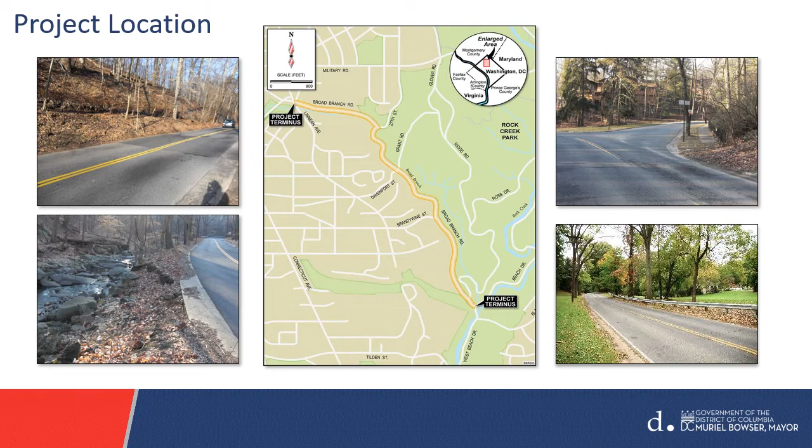Because this project is considered a federal action, the current environmental study is being performed in accordance with the National Environmental Policy Act, or NEPA. NEPA requires that the potential environmental impacts of all federal actions be considered prior to implementation. In the case of this project, there are several factors that make it a federal action, including federal funding, federal permits, and the possible use of federal lands owned by the National Park Service. Therefore, under NEPA, this environmental assessment has been prepared for the proposed actions.

The initial environmental assessment was completed in October 2013, and a public hearing was held the following month. This revised draft environmental assessment has been prepared based on the comments received on the 2013 document. Additional analysis was conducted and has now been released for public review and comment.

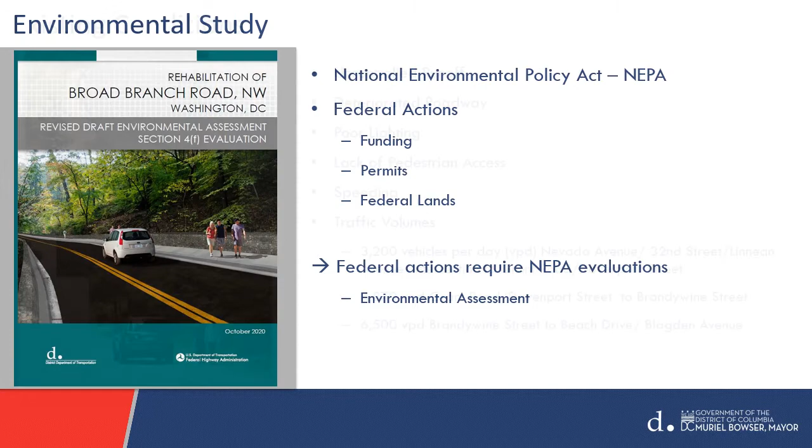The first step in the NEPA study was to identify the existing conditions along the roadway corridor. For many of you that live or travel the corridor, much of this will be very evident. For years, there has been uncontrolled runoff from the elevated parcels, particularly to the west of the roadway, which has led to the deterioration of the existing roadway, as well as impacting water quality upon receiving waters of Rock Creek Park.

For those of you who travel this roadway in the evenings, once it becomes dark, there are safety issues associated with the lack of lighting. Local residents have been requesting safe sidewalks along the roadway be considered, as well as improved pedestrian and bicycle access to and from the park.

DDOT has also heard numerous concerns of speeding on the roadway as it exists today, and the possibility of what it could be like in the future. And if you look at the traffic data on the roadway, it actually carries more volume than you would anticipate. Although rural in nature, the roadway provides a major cut-through and results in the traffic volume shown on this slide.

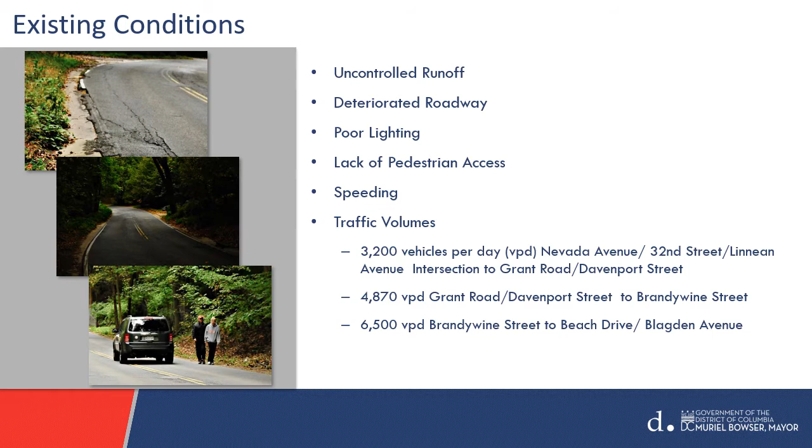By recognizing these conditions, it helps the project team define the purpose and need for this particular project. In very simple terms, the purpose of this study and the proposed action is to rehabilitate Broad Branch Road by correcting the poor road conditions as well as improving drainage to better control stormwater runoff.

Broad Branch Road is also traveled by pedestrians and bicyclists. Several members of the community have indicated that they would like to see improvements for these two modes of travel, by including sidewalks and bike lanes. Others have indicated that they would like to have improved access to Rock Creek Park. And listed last on the slide, but certainly not least, is safety. One of the overriding factors for improving this roadway is to improve the safety of all those that travel upon it.

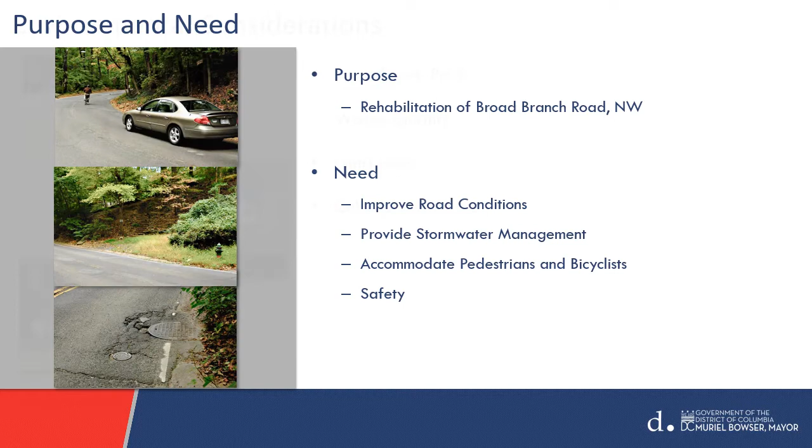While developing improvement concepts for the roadway, the project team had to be aware of the numerous environmental considerations present along the roadway. As noted earlier, Rock Creek Park and Broad Branch Stream border almost the entire eastern edge of this 1.5-mile segment. Water quality in both Broad Branch and Rock Creek has been degraded over the years, some of it attributed to the uncontrolled runoff that comes down from the western slopes and across the roadway before entering these receiving waters. The roadway also traverses a variety of land uses, including residential neighborhoods, embassy residences for 5 different sovereign nations, parks, and several community facilities. And unbeknownst to many, the area surrounding the roadway contains several cultural and historic resources.

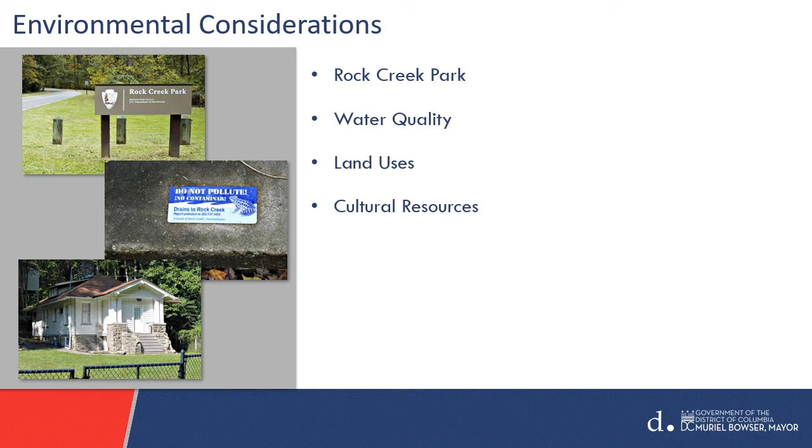As we have noted, there are a number of natural resources in the project area. Most are associated with Broad Branch, either the water itself or the habitat that it provides along its course. There are also several historic resources in the area. Two historic districts bound the roadway and include historic trails and bridges. And there are long lengths of historic stone walls and stone boundary markers associated with Rock Creek Park along the length of the roadway.

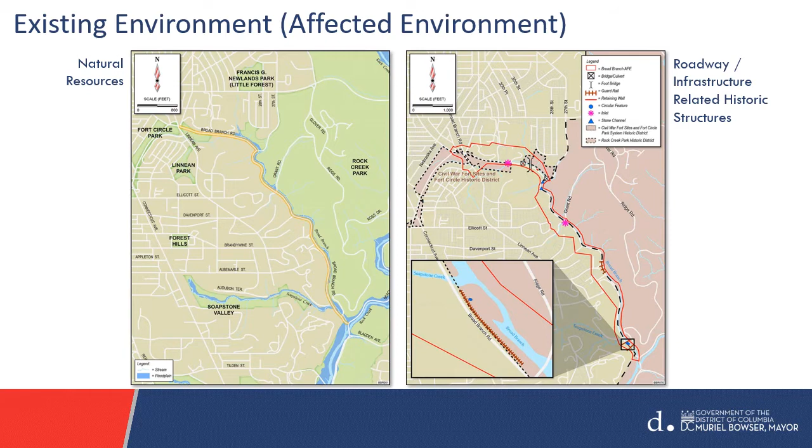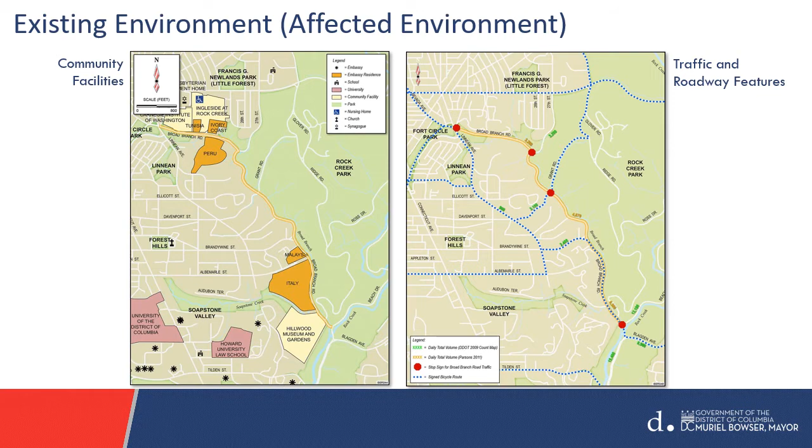The roadway is also lined with a number of residential and community facilities. As shown in the figure on the left, there are embassy residences, parks, schools, and religious facilities, all nearby, and many of which are accessed either directly or indirectly by this segment of Broad Branch Road. And, as noted in the project's purpose and need, the roadway itself provides a very important link, not just up and down Broad Branch Road, but also for the many connections that it provides for commuters and park visitors. It truly serves its intended purpose and actually accommodates higher volumes than was originally anticipated.

There were others who said, if we're going to make this improvement, why not make it safer for pedestrians by including sidewalks on one or both sides? And there was also a large contingent of bicycle enthusiasts that wanted a bicycle lane to be included. All of these comments were taken into consideration. The project team looked at different ways of constructing the roadway, including various lane widths, different types of curb and gutter, sidewalks with varying widths, protected bikeways, stormwater management, and green spaces.

The challenge became, how do you incorporate all of the desired features within a limited amount of city-owned right-of-way? On the northern end of the project, the district right-of-way is as wide as 90 to 120 feet. However, on the southern end, it is limited in some areas to 30 feet. Commenters who said, 'I want wider roadways. I want improved curb and gutter. I want sidewalks. I want bike lanes,' came to the realization that they were asking to fit a 50-foot wide facility in 30 feet of available right-of-way.

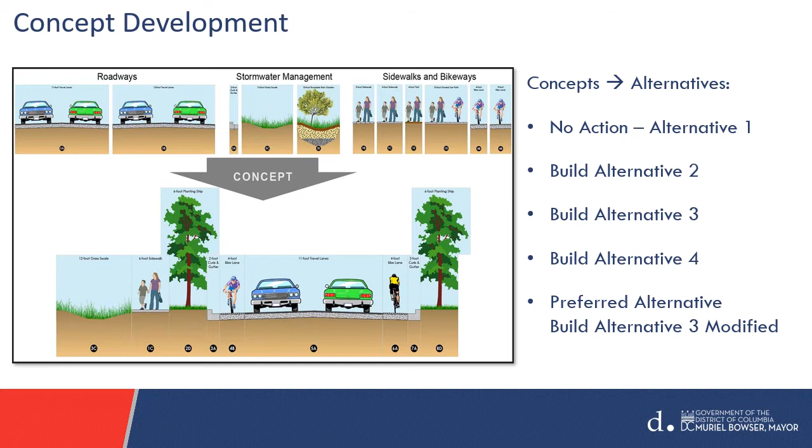And if concepts exceeded the width of the existing right-of-way, then there would be right-of-way constraints on both the east and west side of the roadway, and some of the environmental features described previously would be impacted. That is the process that was used, along with more detailed engineering analysis that resulted in the set of candidate alternatives listed here that are evaluated in the revised draft environmental assessment.

The initial environmental assessment included 4 candidate alternatives, one of which is the no build or no action alternative. For this alternative, DDOT, as owner of the roadway, would continue to maintain it on a routine basis and keep it as safe as possible without any major reconstruction.

It goes without saying that the no action alternative does not meet the purpose and need of the project. However, it does serve as a baseline when comparing the benefits and effects of the candidate build alternatives. These comparisons are included in the environmental assessment and will be illustrated later in this presentation.

3 build alternatives were evaluated in the original environmental assessment, simply referred to as alternatives 2, 3, and 4. After issuance of the environmental assessment, a 4th alternative was developed to further minimize potential encroachments on Rock Creek Park and Embassy lands, referred to as Alternative 3 Modified. Each of the candidate build alternatives have several common improvement features, presented in the following slides.

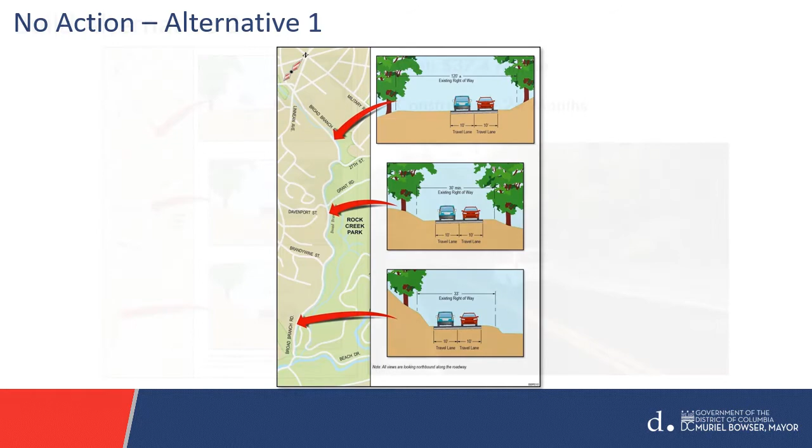Candidate build Alternative 2 represents the minimum width improvement that could be done within the existing DDOT-owned right-of-way and meets the project's purpose and need. It would rehabilitate the 2 existing 10-foot travel lanes along with the addition of standard curb and gutter on both the east and west sides of the roadway.

On the northern end, where there is additional right-of-way available, the standard curb and gutter on the west side would be replaced with a bioswale or linear rain garden to better control stormwater runoff. That was a greener way of accommodating runoff, tied into a daylighting program implemented by the District Department of Energy and Environment. Alternative 2 is estimated to cost $33.7 million and would take about 24 months for construction.

The next alternative, Alternative 3, expanded the overall width of the project by including a continuous sidewalk. As shown in this slide, the typical section would include 2 10-foot travel lanes with standard curb and gutter, with the exception again at the northern end where the linear bioswale replaces the concrete gutter.

A new 6-foot wide sidewalk would be included on the west side of the roadway for the entire length. This alternative involves more infrastructure than Alternative 2, and thus involves more land, cost, and a longer construction period. Alternative 3 is estimated to cost $43.7 million and would take an estimated 30 months to construct.

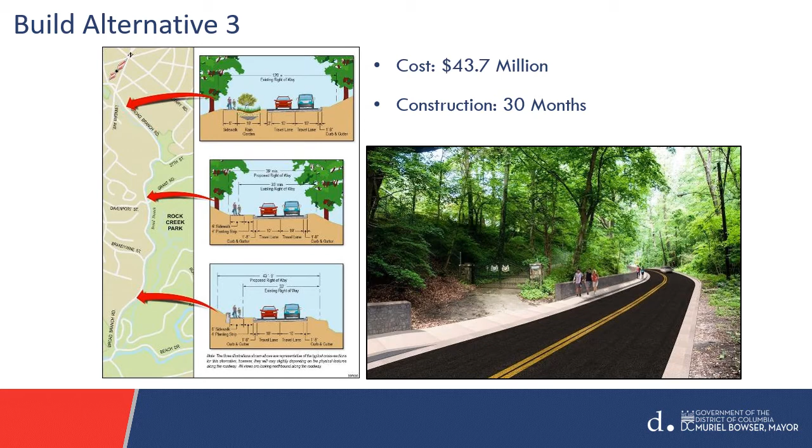Alternative 4 was developed to accommodate all 3 modes of transportation: autos, pedestrians, and bicycles, and as a result, it is the widest of the alternatives. It incorporates the same 2 10-foot travel lanes and 6-foot sidewalks, but also incorporates a 4-foot bike lane on the eastern side of the roadway.

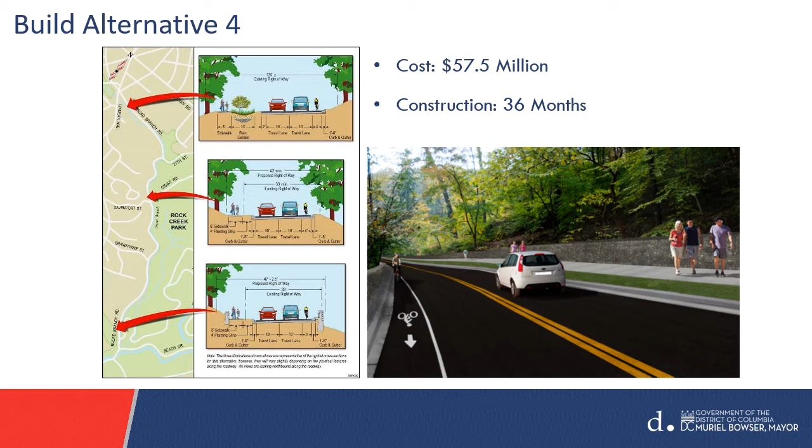It was felt that it would be safe to put a bike climbing lane on the east side to allow cyclists to travel up the hill. Coming down the hill, cyclists would be merged with roadway traffic. This alternative involves the most infrastructure of all the build alternatives, and as a result, requires more additional right-of-way, higher cost, and a longer construction period.

Alternative 4 is estimated to cost $57.5 million and requires a 36-month construction period.

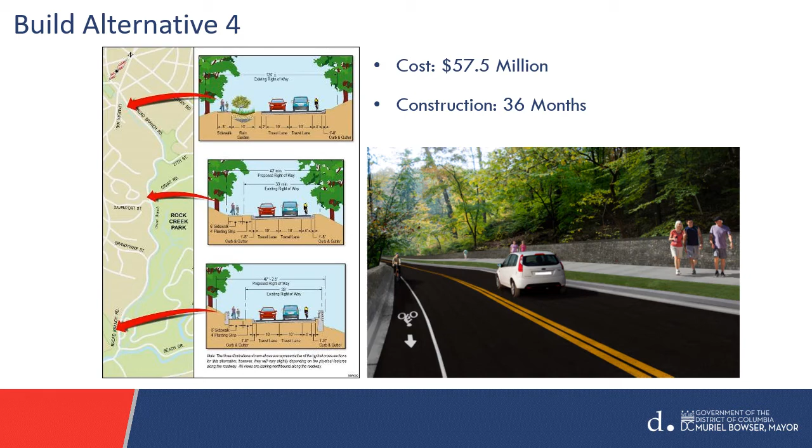Each of the preceding alternatives were evaluated in the initial environmental assessment, released in 2013. Following publication of that document, DDOT continued to approach the U.S. State Department and the foreign embassies for additional right-of-way needed to widen the roadway. After significant coordination, DDOT developed a revised alternative that would not encroach upon any of the sovereign nation's lands.

The original Alternative 3 was modified to create this new alternative. The typical section would include the same two 10-foot travel lanes with standard curb and gutter, with the exception at the northern end where the linear bioswale replaces the concrete gutter.

Similar to Alternative 3, this modified alternative expanded the overall width of the project by including a continuous sidewalk. However, the sidewalk was reduced in width in areas along the sovereign nation properties, shown in the next slide. This revised alternative involves slightly more infrastructure than the original Alternative 3, however less new right-of-way.

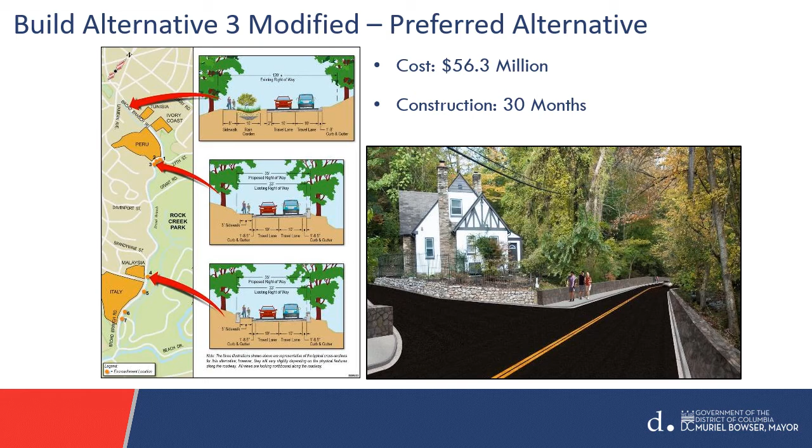In developing the proposed improvements, the project team looked for ways to minimize the amount of cut and fill that would have to take place outside the edge of the existing roadway. Existing retaining walls would be rehabilitated where needed, and several new walls, such as those shown here, would be constructed.

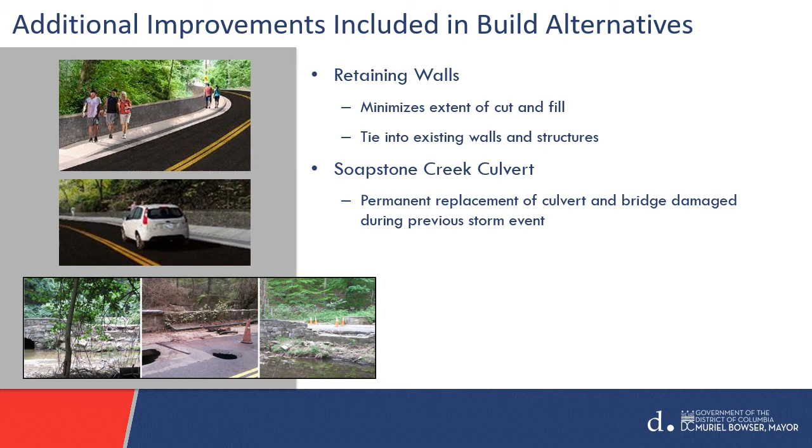In addition, DDOT proposes to replace the culvert at Soapstone Creek. The original bridge culvert washed out several years ago during a major storm, and a temporary fix was put in place. A new bridge culvert will be constructed under each of the build alternatives.

The revised draft environmental assessment includes refined assessments of each of the alternatives just described and presents their potential effects, both beneficial and negative. The next two slides present the results of these supplemental assessments and provide comparisons of each alternative's effects on the natural, cultural, and socioeconomic resources in the project area.

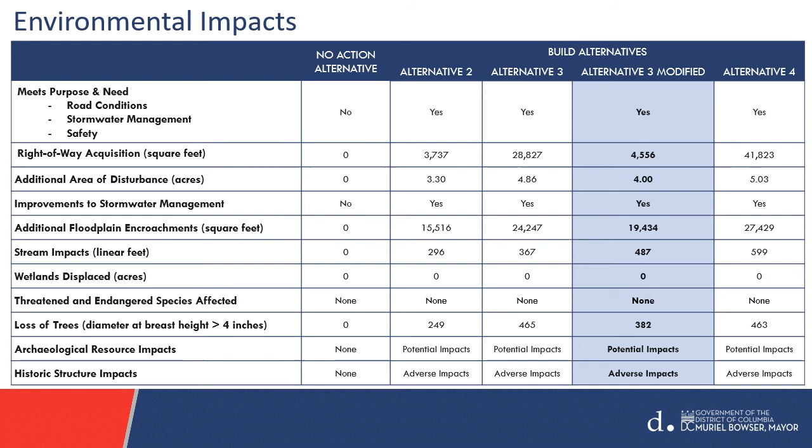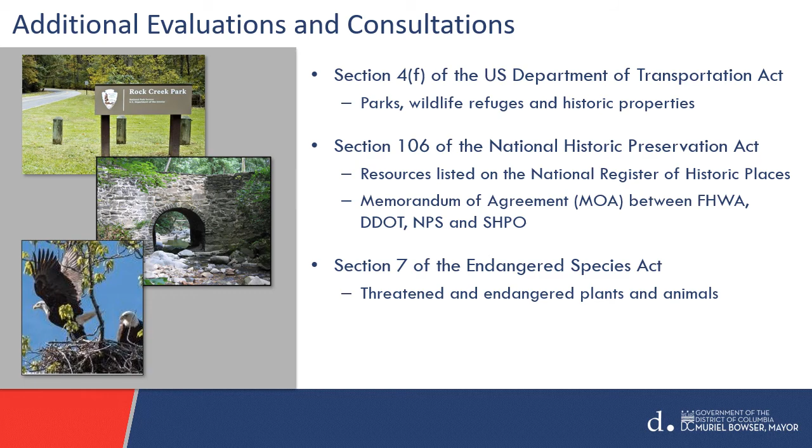This slide presentation is intended to provide you with a refresher on the project and a summary of the findings contained in the revised draft environmental assessment. A digital copy of the complete environmental document is available on this project website.